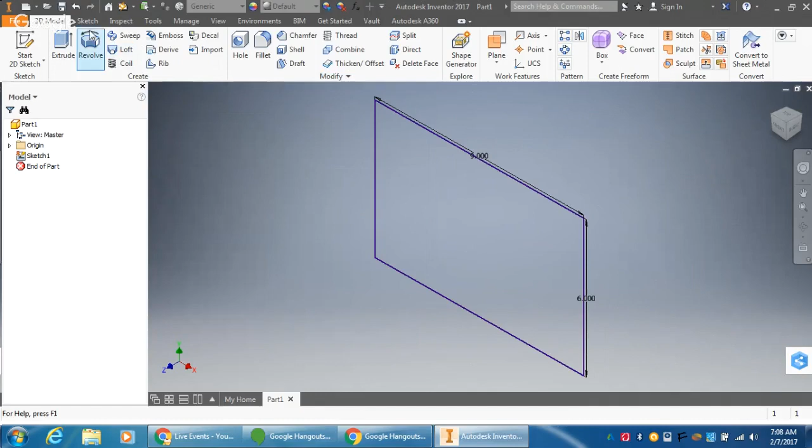Home key on the keyboard so I can see what I've done. Okay, all right, well that one's pretty good. So let's just go ahead and extrude this. I'm going to finish my sketch. Maybe I'll try that home key there just to show you that brings it into an isometric. I'm going to extrude, and I want to extrude this one 4. Enter.

All right, so what do I want to do next? The first thing I want to do is come over here and place a new sketch by right-clicking, new sketch. There's a home key on the keyboard so I can see what's going on. I want to cut out a circle starting from this center point. So I go to the center point circle tool, which is right here - it should be the default. Make sure I start on this corner, and start dragging this down. I can select the diameter.

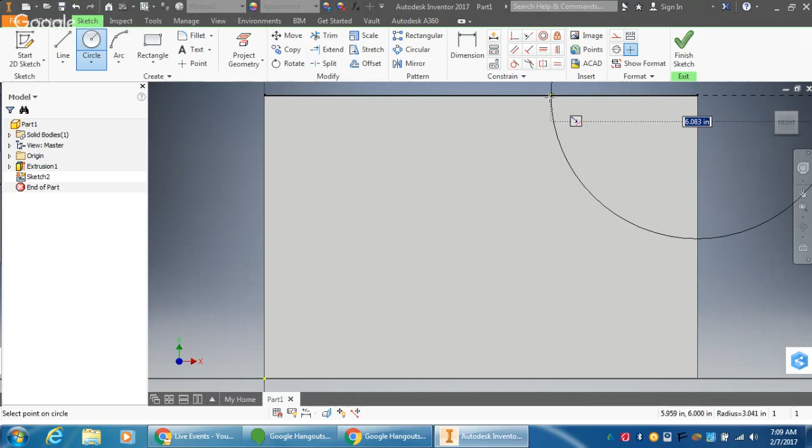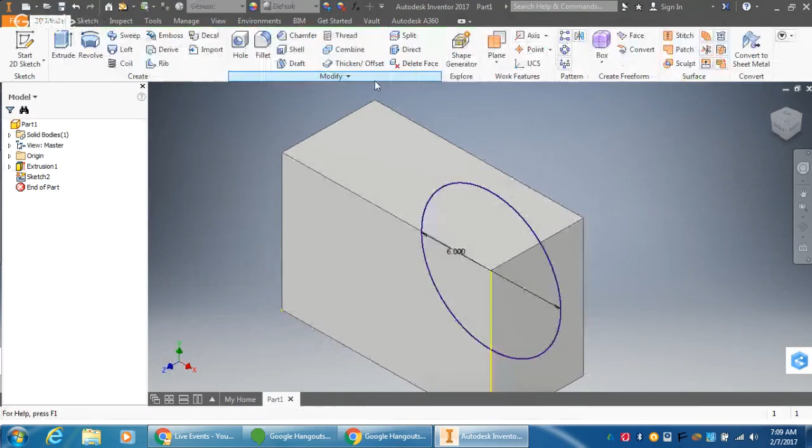Okay, so what does this diameter need to be? Well, this diameter needs to be 6. So 6, enter. How do I know that? Well, I know on this part that I need to cut a nice even circle out of here that is 1, 2, 3, 1, 2, 3. That 3 is a radius, therefore diameter is always double my radius. So I can finish my sketch, extrude, and I want to cut. All right, and there we go - that's how I cut in a circle.

But how do I do one that's kind of rounded over and still tangent? Well, there's a little cheat for that - all we have to do is add a fillet. Here's your fillet tool. If you leave your mouse there for a second, it shows you how I can fillet around corners. Or I can just go over to an edge, right-click on it, and it'll give me an option to fillet because it's a common thing to do. And here we're actually looking at the radius of this fillet.

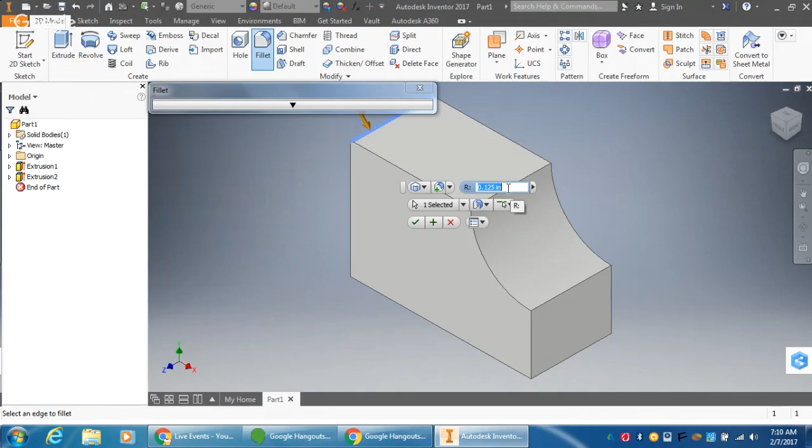So the radius of this fillet, you can tell by looking in your paper and seeing where the center point is. So the radius of this fillet is 2. All right, and then hit this little check mark, and there's our part done. Pretty simple, and we have a center point of that radius, which is 2.

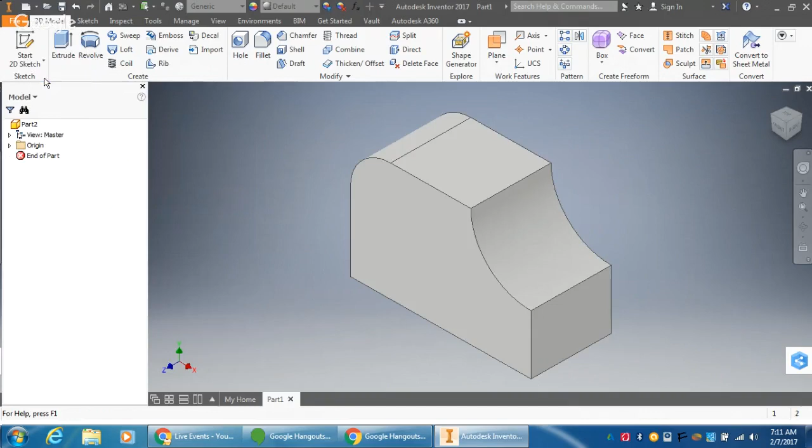All right, let's move on to the next one here. I'm going to grab a new part, a 2D sketch, XY plane, 2-point rectangle. Start at the origin, drag up positive X, positive Y. This one starts off with 10, tab, 6, enter. Home. And just like we did before with the circle, I'm going to do something a little different this time.

I'm actually going to do a very similar thing, but in 2 dimensions. So I'm going to grab my center point circle tool here. I'm going to get all the way till this turns green - see how that turns green there in the center? That means I'm snapped to the center point itself, which is what I want. All right, so I'm going to click and start dragging down.

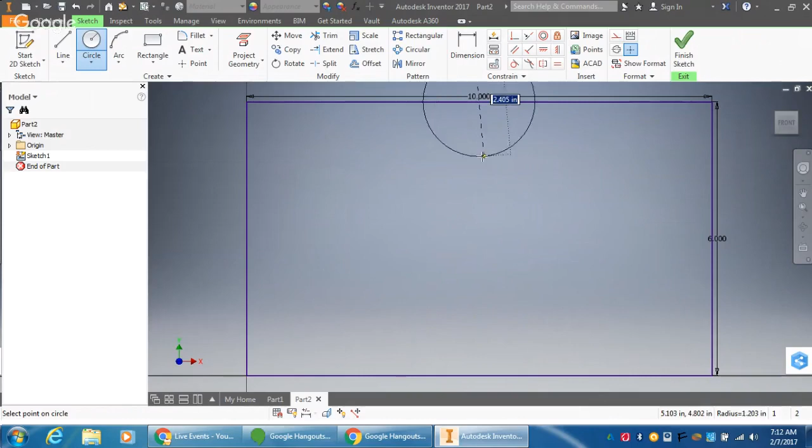And the radius here that I want is a radius of 3, which means my overall diameter is going to be 6. So, 6, enter, home so I can see what's going on.

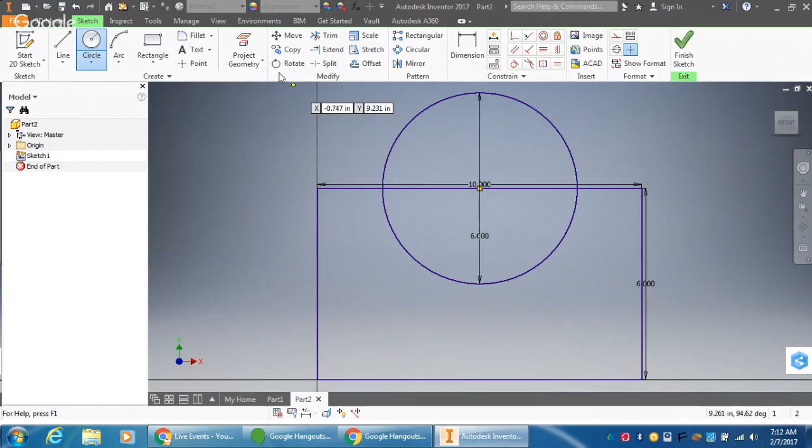And I only really want to extrude this part here. So in order not to confuse the program, I can trim parts that I don't want. You see there's the trim tool right there, and you see how that works. It just trims off the excess, and now I have the exact shape that I want.

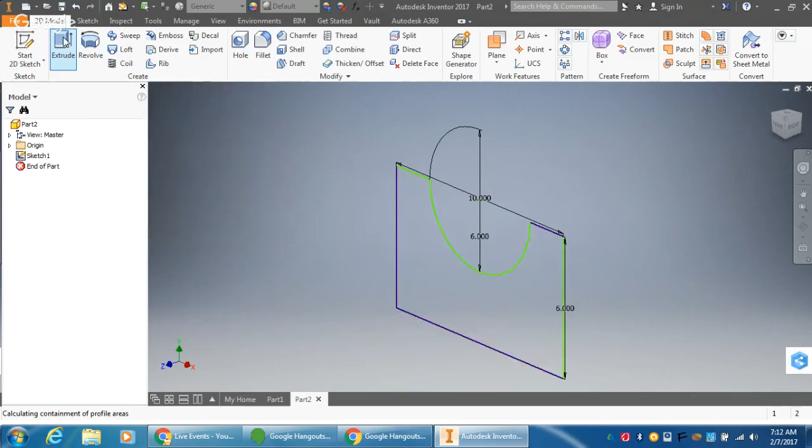So I'm going to finish the sketch, home key on your keyboard, and just extrude that to the distance I want, which is 4. Enter, home. There we go. All right, that one was pretty simple. I did all that in one step.

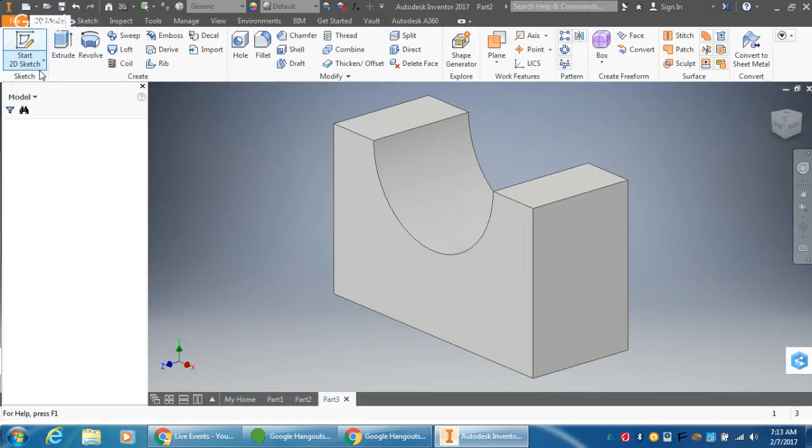Well, let's try something a little different. Make sure, again, you save it, and make sure you save it in the correct spot, so you know where you're saving your parts. Grab a new part. New 2D sketch, XY plane.

2-point rectangle, starting at the origin, positive X, positive Y. We're looking for the overall here. Let's make this one 11, tab 2, enter. I'll hit home. So I'm making the long piece at the bottom.

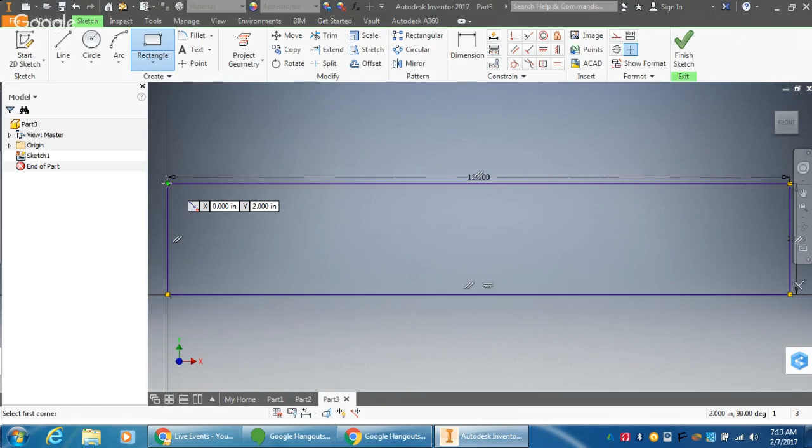Then I'll just grab another rectangle to square off this shape, and I'll add in a square right here that is 4, tab 4, enter. Home. So you see what I've done is I've taken this rounded off shape and just blocked it out. So I'm going to finish this sketch.

I'm going to hit the home key so I can see everything. Now I want to extrude, make sure I have the profile here, and I want to select both profiles, and extrude both of those a distance of 4.

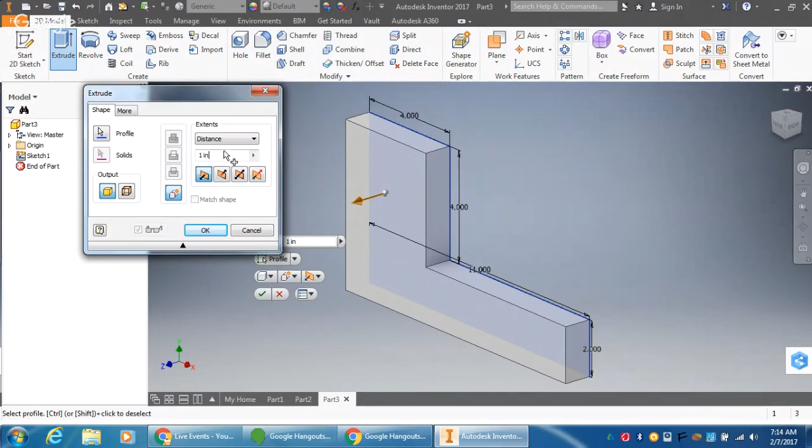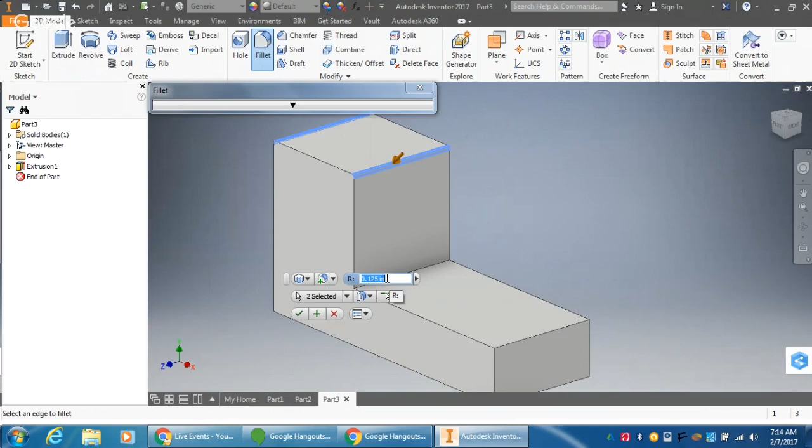Okay, so I'm going to do something a little fancy here. If this is 4 across here, and I want to make this a perfect circle around, that means the diameter of this half circle that gets rounded off is going to be 4. However, the fillet uses a radius, so if I take 2 fillets, each with a radius of 2, 2 plus 2 equals 4, right?

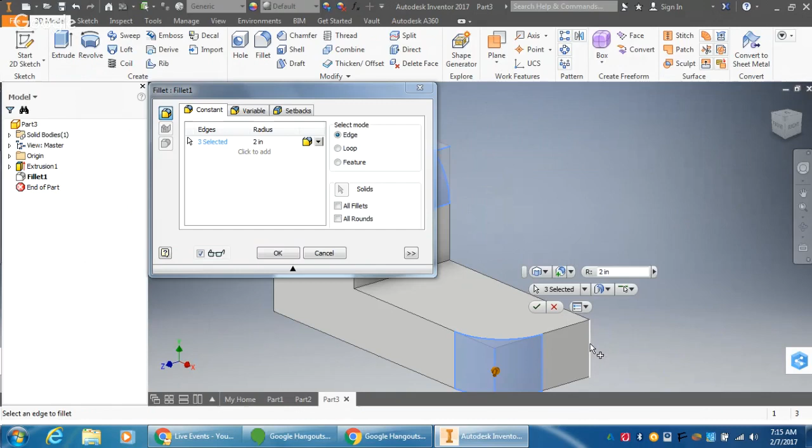Or 2 radii equals a diameter. Oh, check that out. You know what else is kind of neat? Since this distance that I also need to round off is also 4, I'm just going to double click this fillet, select edges here, and select 2 more edges. Click OK. Kind of neat, right?

Something else I can show you here is if I right click and add a new sketch to this surface, and press the home key on the keyboard so it squares up nice and square with me, I want to cut a little hole out of here. That hole is going to have a diameter of 2. Since I have 2 fillets that both have the same center point, the computer's pretty smart, it can actually give me the center point of where to stick this.

Well, if I look on here, I'm looking for this little thing, it's like a little point. Okay, see this center point? And what this center point does is it allows me to place this center point here. I could do that, or as an alternative, because I'm going to have to dimension that, what happens if I project that geometry?

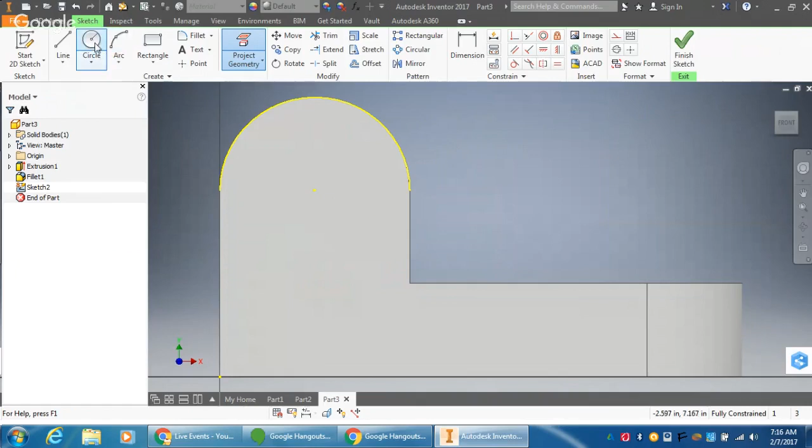And now I grab my center point circle. Can you notice that we already have a center point here because I already projected that geometry? It's really light yellow, I don't know if you can see that on your screen. But I actually can snap to that now without having to measure anything. Remember, that was a diameter of 2 that I wanted. And there we go. So I can go ahead and finish that sketch.

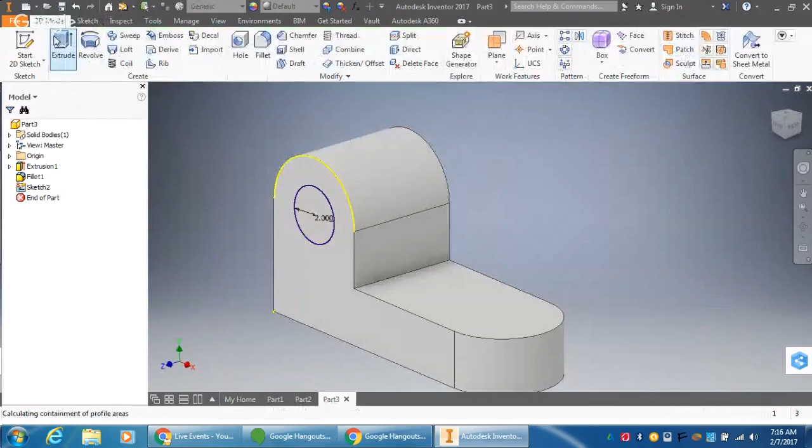I can extrude, I can cut. It's already set up as 4 because that's what I used last time. And I can click OK. All right, we're almost done. What else do we have to do?

Well, let's go over here, put a new sketch on this surface. Hit home. And I'm going to try to use the same geometry. So again, I'm going to project the geometry of this, and you can see the center point show up, which is kind of cool.

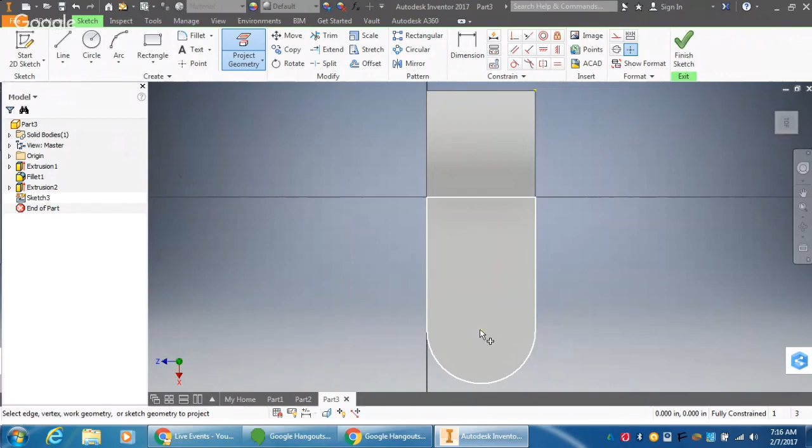All right, so now we have a slot, okay? When you see a rectangle with rounded edges, that's called a slot. Now there are two different ways we could do that. We can make a rectangle and fillet the corners, which we could, or we can actually grab the slot tool.

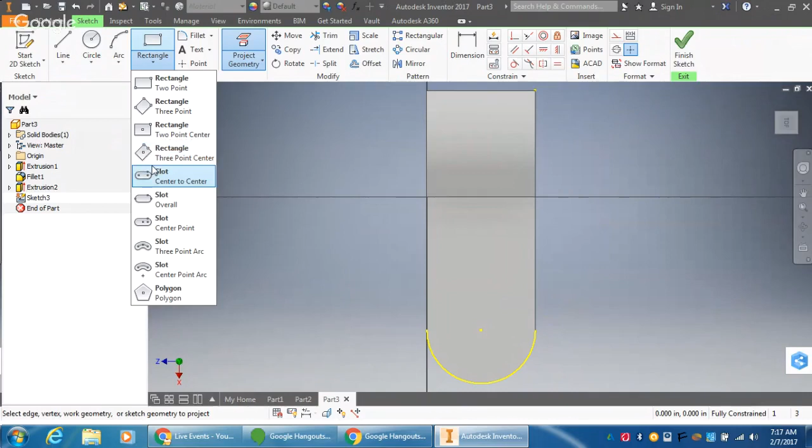And what I want is center to center for this slot, because I know there's going to be 2 center points. So I'm going to start at this center point. It's going to ask me how far is it from center point to center point, and that's going to be 3.

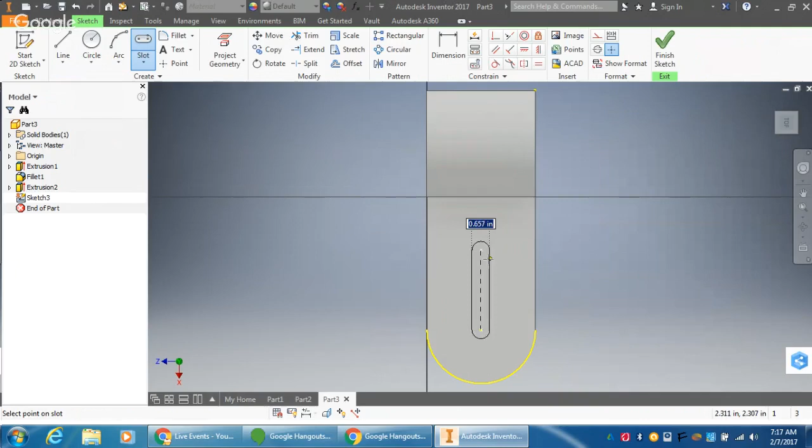And now, after I make sure it's 90 degrees, it's going to ask how wide is this. If I look on my paper, that is 2 wide, 2, enter.

And it comes up with all these different geometric constraints that you don't have to worry about doing yourself, such as parallel, tangent, circle edges. So you can actually take a look at these, and these symbols down here are all the same as symbols up here.

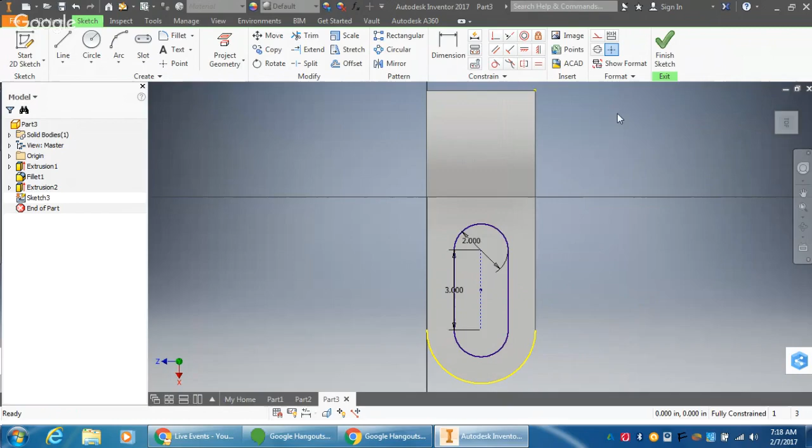And if you want, you can go in and modify them by hitting escape, then go through and click on them. But we're not going to do that. I'm just going to finish my sketch, extrude, and cut, click OK, and our part is done. Nice and simple.

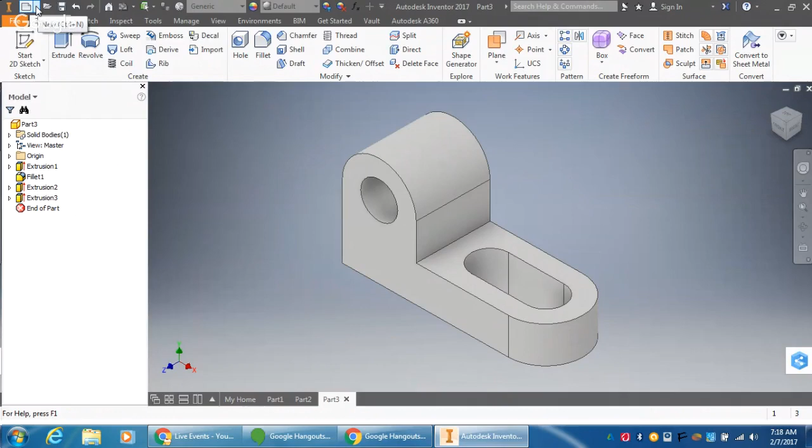Let's go ahead and save that. So let's move on to the last one we're going to do. I'm going to go to New Part and make it the same way, using the same method here. So 2D sketch, XY plane.

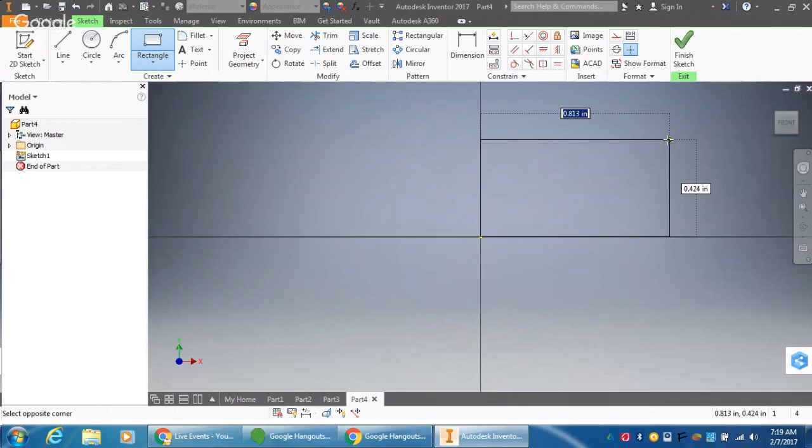Oh no, my 2-point rectangle is gone. I clicked on a slot, so let me go back to my 2-point rectangle. Notice there's a bunch of different ways to make a rectangle. Grab the 2-point rectangle, start in the origin, drag up positive X, positive Y. This one I want 12 tab 2, enter. So 12 by 2.

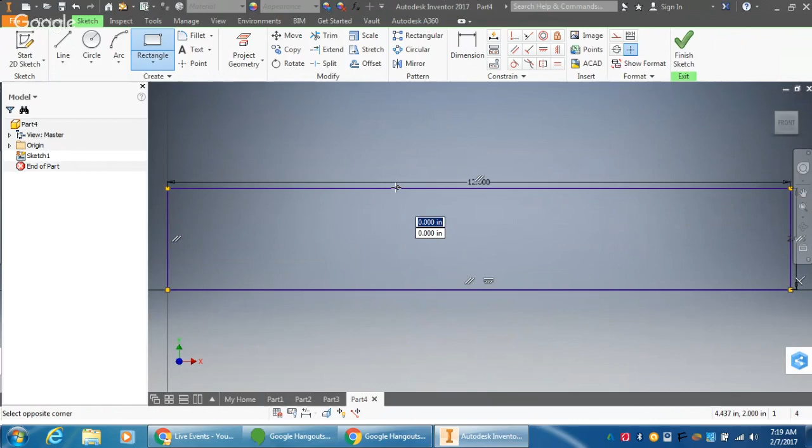Next, what I want is another square here that is going to be 4 by 4. So I'm going to start dragging a square somewhere in the center. It's not going to be exact, so I don't have to dimension it. 4 tab 4, enter. Home. And I need this to be in the center of this geometry.

And there's a few ways to do it. The easiest way is to say that from here to there needs to be 4. Remember our math, 4 plus 4, and there's 12 here, right? So this is 8, 8 here. 12 minus 8 is 4. So this remainder area from here to here is automatically going to be 4.

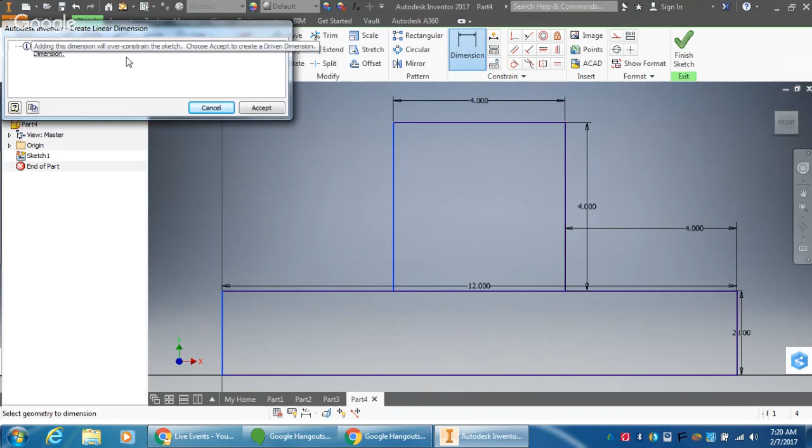And again, remember, we can test that by just clicking here. We should get an error: adding this dimension will over-constrain the sketch. Choose to accept a driven dimension, which puts it in parentheses. So our math is correct, so we're good to go.

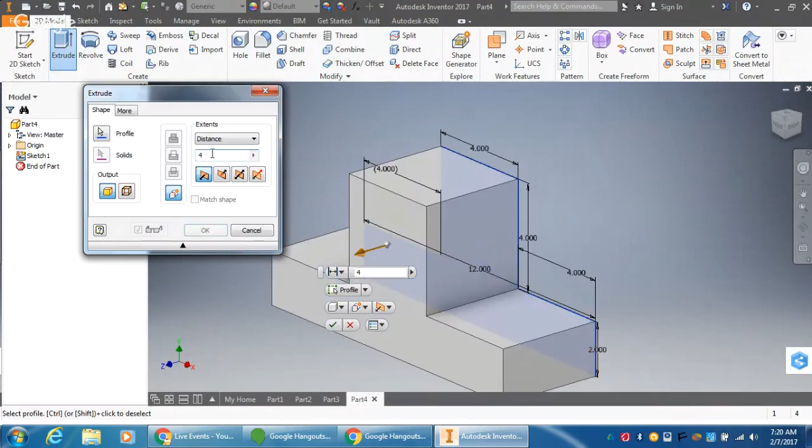I'm going to go ahead and finish this, hit home, extrude, select both profiles, make sure that this is extruded 4. And again, since we have 4 and 4 here, we're just going to fill it.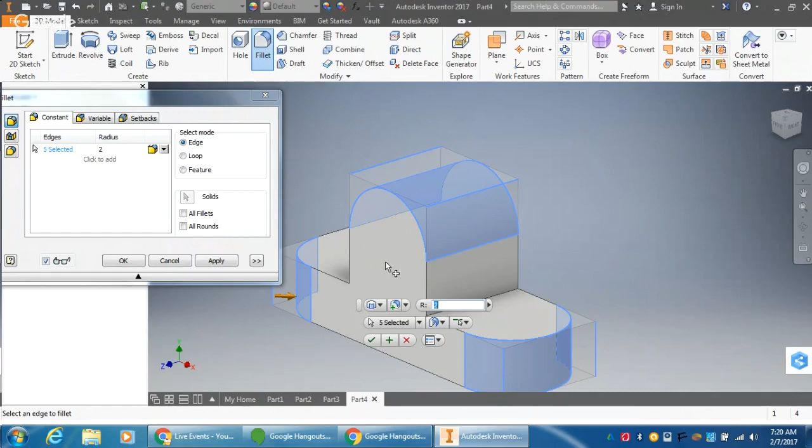And I'm going to fillet all of these edges - this one, this one. I'm going to make sure I have a radius of 2. This one, this one, this one. And I'm going to rotate my view cube, make sure I grab the correct line and that one, all in one step. They're all a radius of 2.

I'll go back to my standard isometric view. And now I just have to drill some holes. And again, these holes are going to be concentric, meaning that they have the same center point.

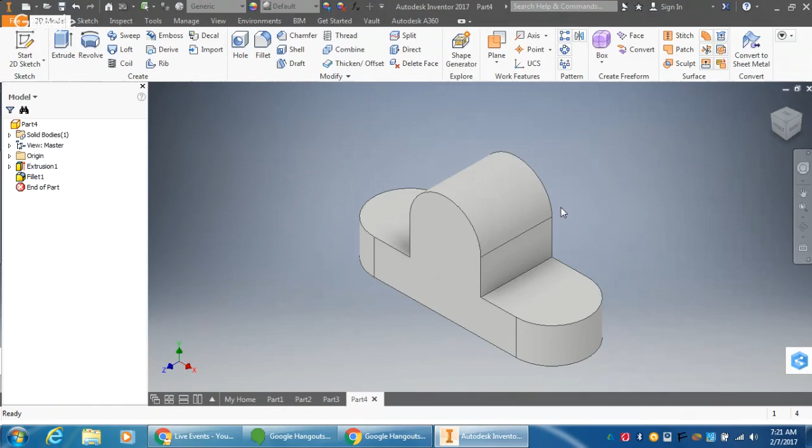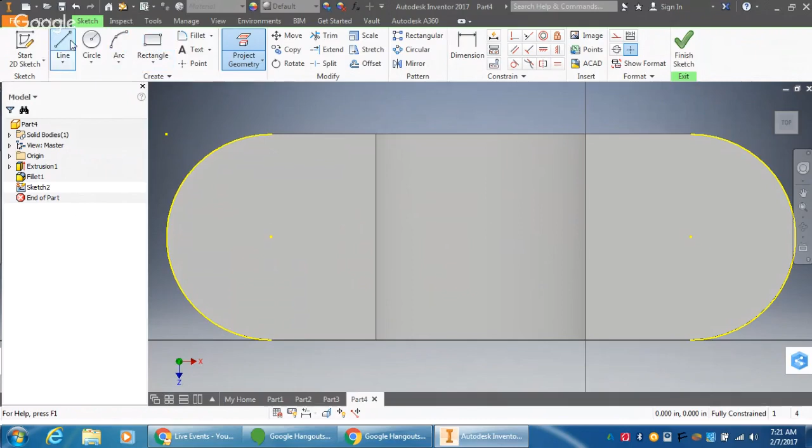So it's pretty simple. I'm going to start a new 2D sketch, hit home. And because it's easy this way, I'm going to project that geometry. I can do this because these two surfaces are on the same plane - they're coplanar. Then I'm just going to grab my circle tool, put that right on the center point again, 2, enter, right here, dragging out, 2, enter, escape.

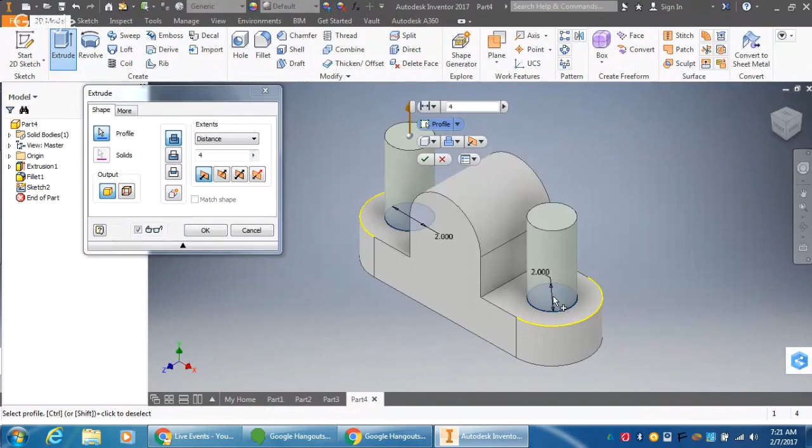There we go. Finish that sketch. Extrude, profiles, that circle, and cut them. Click OK. Pretty simple.

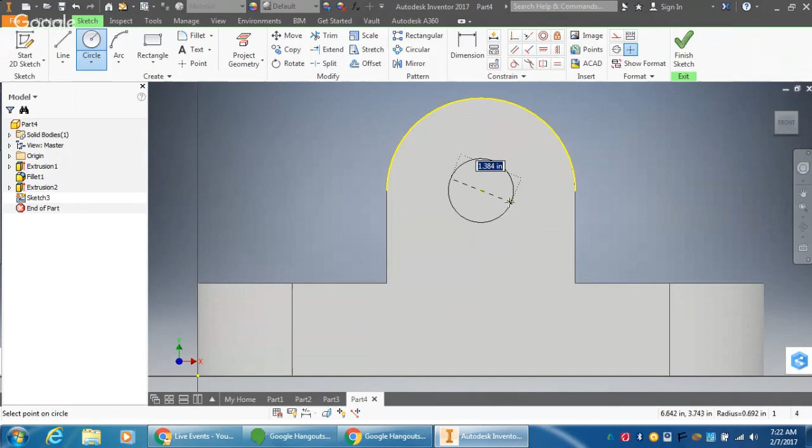Now let's go in here. I'm going to put a new sketch here and do the same thing. Home, project geometry, project just that curve so I get the center point, go to my circle, overlap my center point so they're concentric, 2, enter, and finish the sketch. And here I'm going to extrude, and cut. Okay, and there we go.

We're all finished up. Alright, so this time we were really focused in on circles, center points, and fillets. And then from now we're going to be using those sort of techniques next video and the next set as well before we get into anything much more complicated.